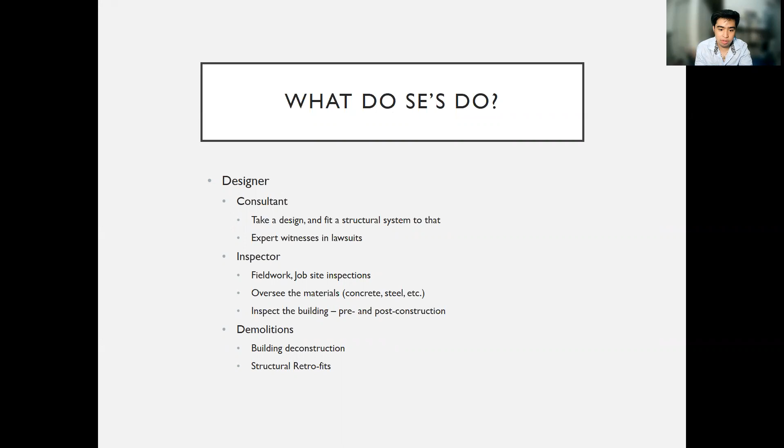Building deconstructions, structural retrofits. And the last one is what do they design?

What is a structure? A system designed to resist or support loading and dissipate energy. Building structures: houses, skyscrapers, anything designed for continuous human occupation. Non-building structures: bridges, tunnels, and dams.

So let us proceed to forces. Influence on an object that causes a change in a physical quantity. Considered vectors: magnitude and direction.

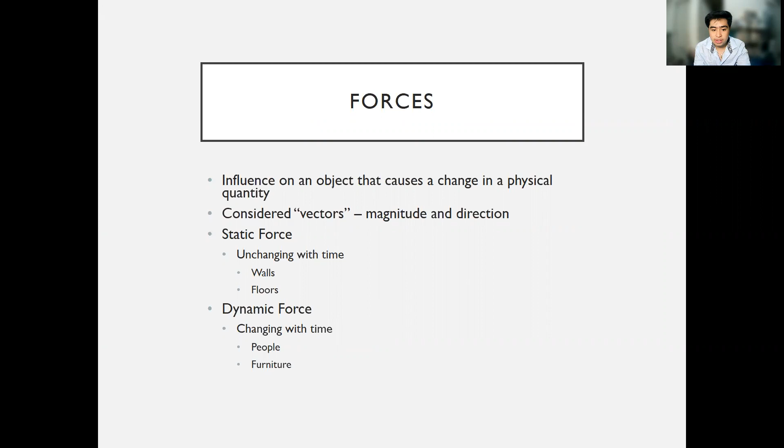Static force, unchanging with time: walls and floors. Dynamic force, changing with time: people, furniture.

So forces: axial forces, acting along one axis directly on a point or surface.

Momential force, acting along an axis at a certain distance from a point, causes a folding motion. M is equal to F times D, or force times distance.

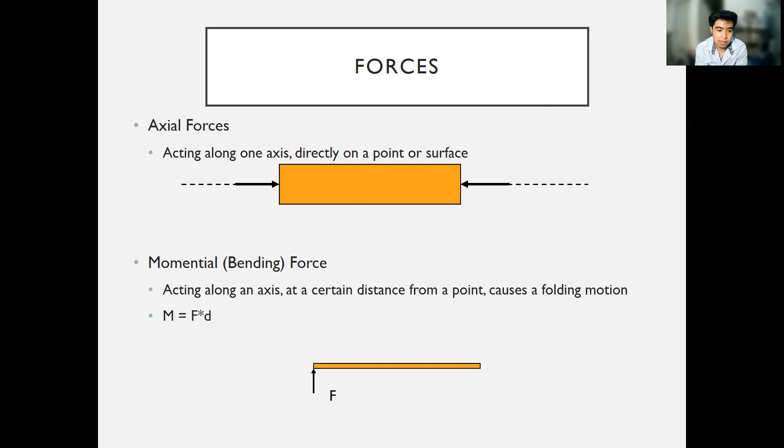Tensile force: pulling on an object, stretching it, showing necking when too much tensile force is applied. Compressive force: pushing on an object, collapsing it; concrete crushes when too much compressive force is applied.

Strain, a tensile-related property: deformation over length. Stress, a compression-related property: force over area. Compare using a stress-strain graph.

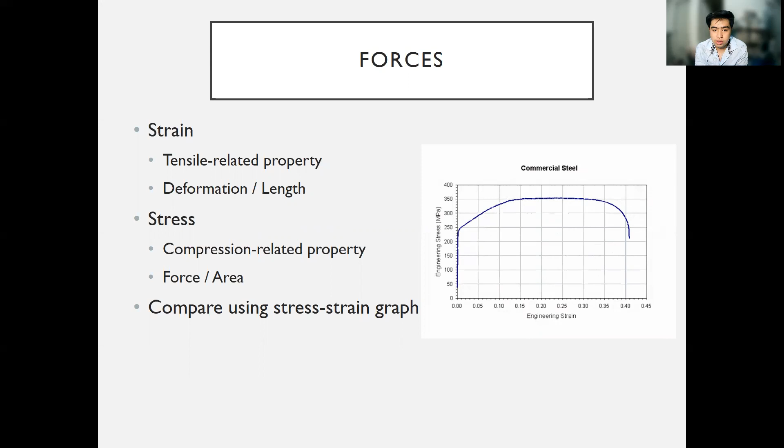What constitutes loading? Loading is a force being enacted on the structure. Many sources of load: gravity or weight, wind, snow, earthquake, and man-made.

Two types of structural loading: dead loads, static, ever present, example walls, floors, etc. Live loads, dynamic, changing.

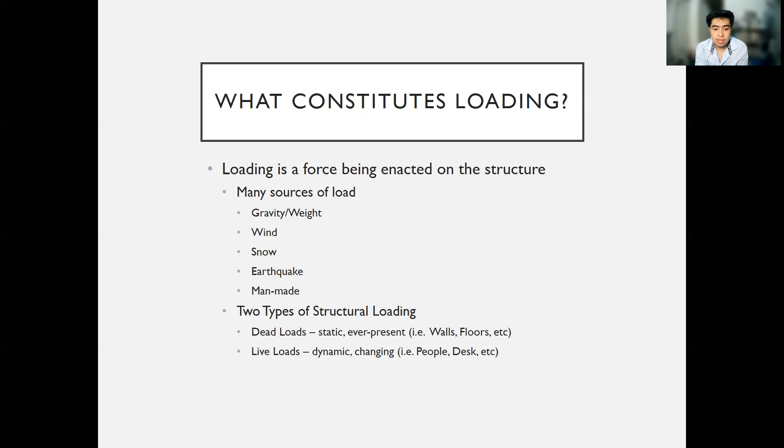What should we build our structures out of? Common structural materials: timber, masonry, concrete, steel, and composites.

Common material properties: strength, tensile or compressive, density, hardness, ductility or brittleness, elasticity, and toughness.

Strength: ability of a material to withstand loading. Tensile strength: ability of a material to withstand a pulling force. Steel is good at this, but concrete performs very poorly.

So let us watch a video.

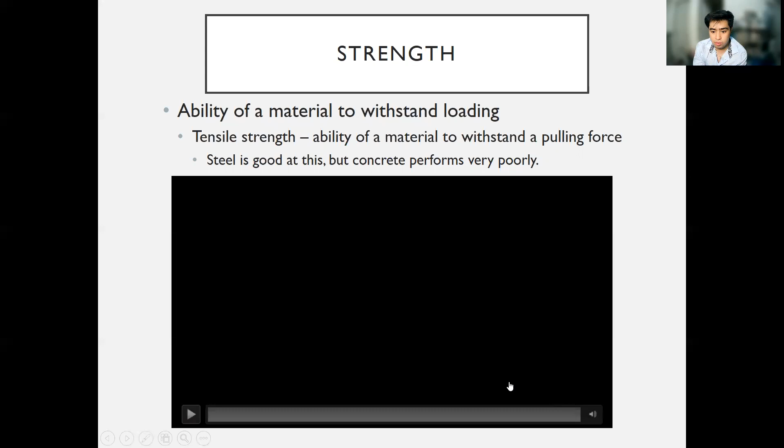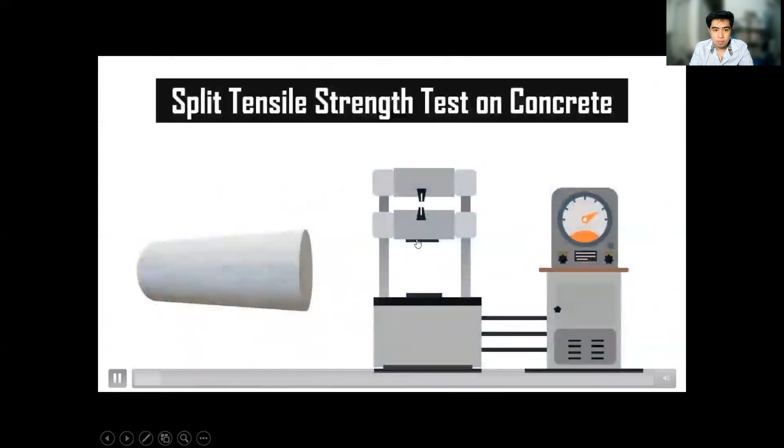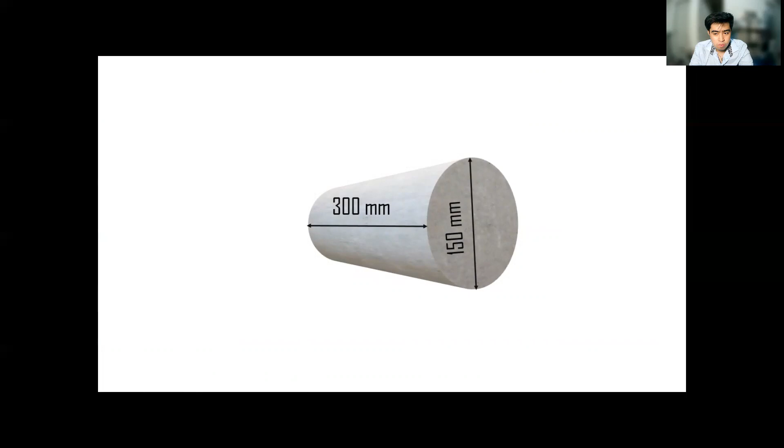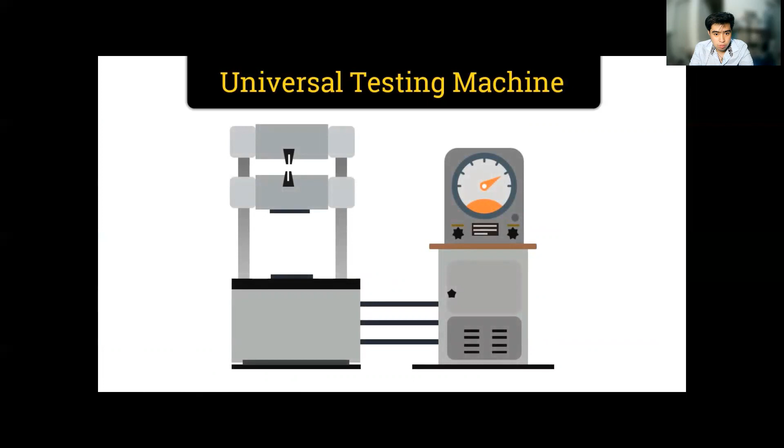Split tensile strength test on concrete. In the split tensile strength test, the tensile strength of concrete is obtained by applying a compressive force along the length of the concrete cylinder. The specimen used for this method is cylindrical in size, with dimensions of 150 mm in diameter and 300 mm in length. The instrument used for this method is the universal testing machine. The specimen is prepared in the standard manufacturing procedure and placed in the mold in layers, tamped using 25 blows for each layer.

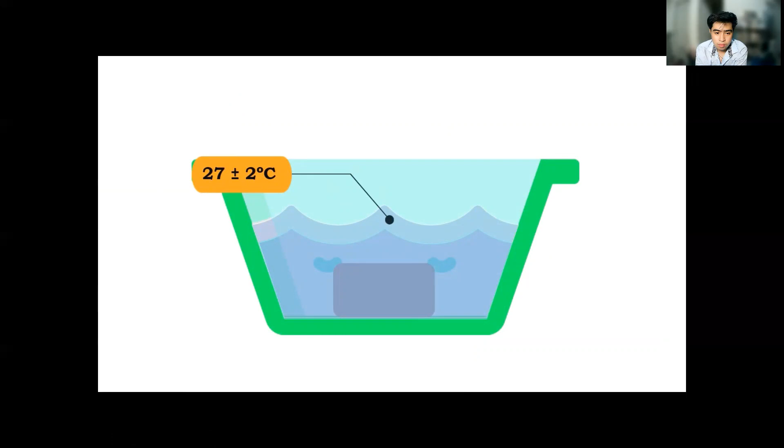After a day, the mold is removed and the specimen is placed in the curing tank at a temperature of 27 plus or minus 2 degrees Celsius. Depending upon the requirement, the test specimen is removed from the tank and dried at 7, 14, and 28 days for testing.

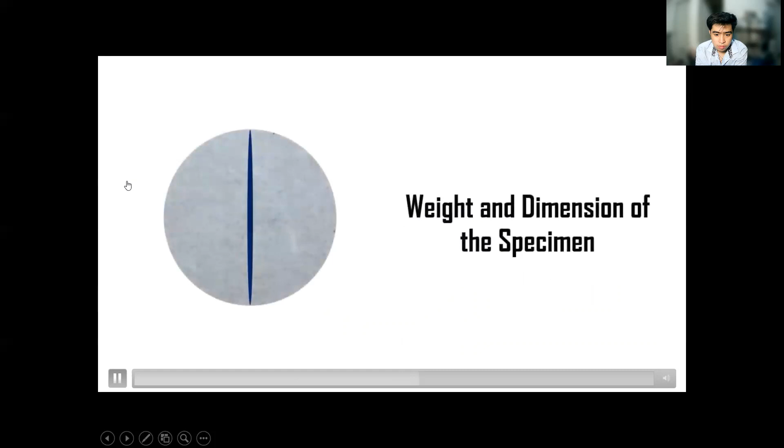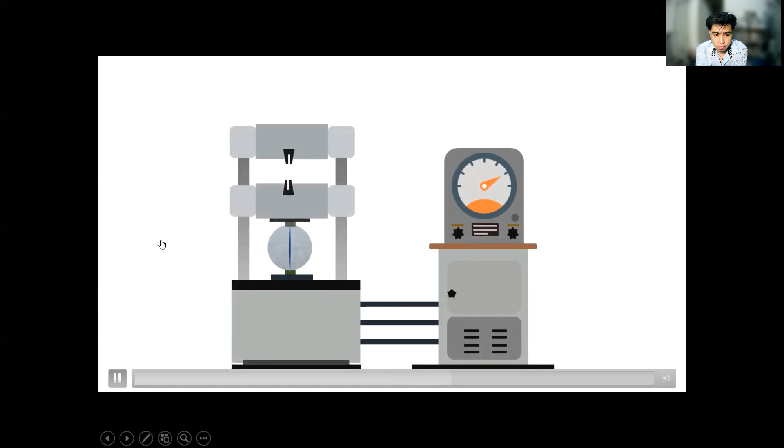Draw the line on the specimens as displayed on the screen. Then record the weight and dimension of the specimen. The specimen is placed longitudinally in the machine. A bearing strip made of plywood is placed on both sides of the specimen and aligned according to the marking. Sometimes supplement bars are placed on top of the plywood depending upon the diameter of the specimen.

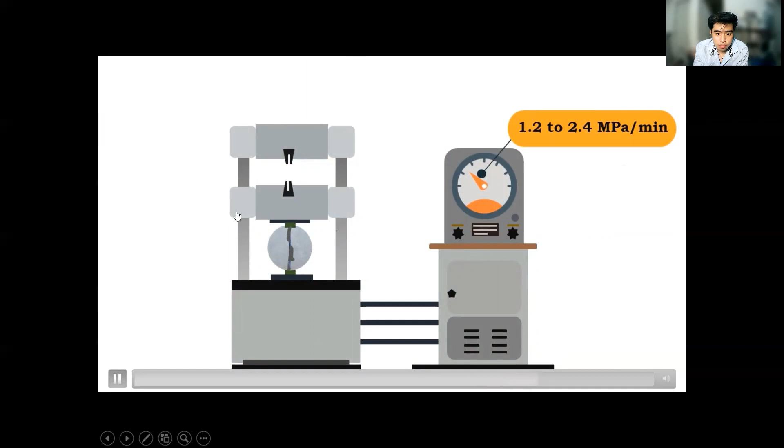Now apply the load continuously at a rate within the range of 1.2 to 2.4 MPa per minute. Finally, note down the load at which the cylinder fails by developing cracks. The resultant split tensile strength is calculated by the equation 2P divided by Pi into D into L, where P is equal to the load at which the specimen breaks.

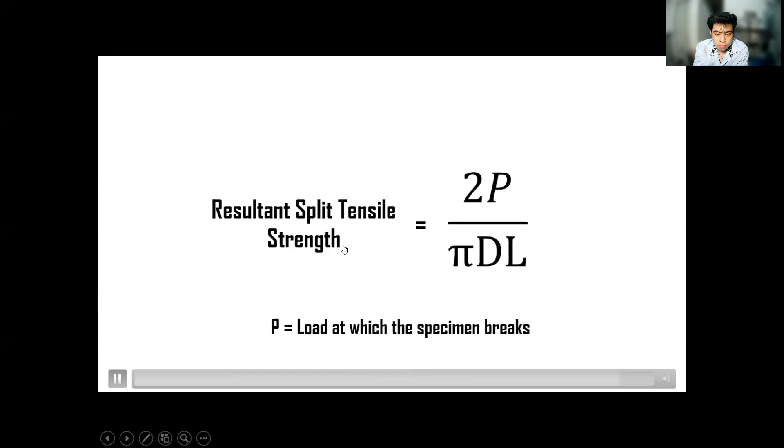So let us proceed to strength. Ability of a material to withstand loading.

Compressive strength is the ability of a material to withstand a pushing force. Wood, concrete, steel, and masonry perform well.

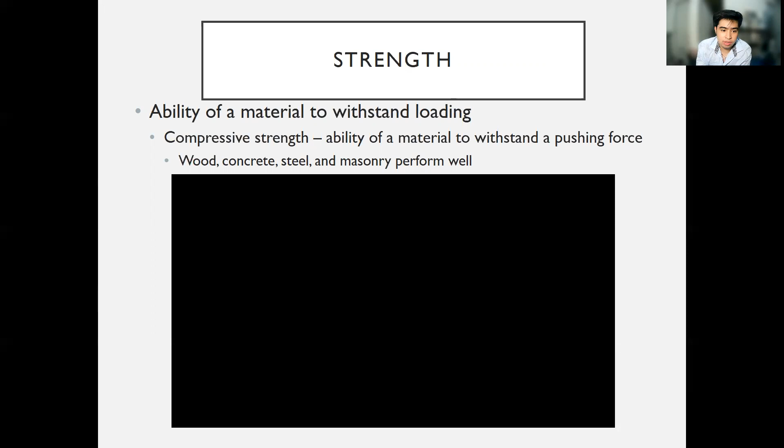So let us watch again a video.

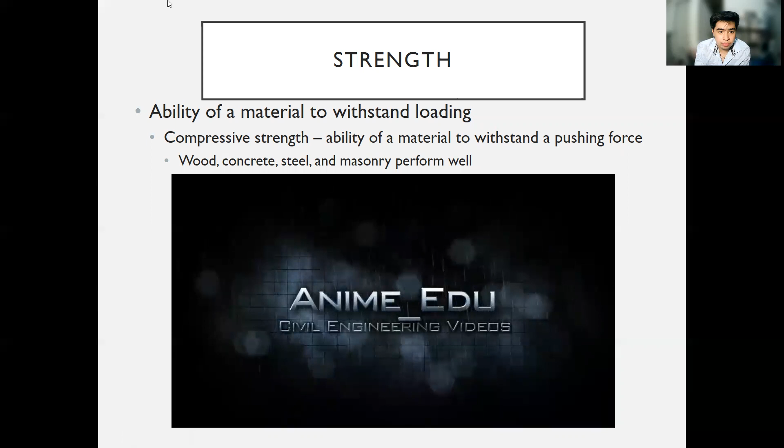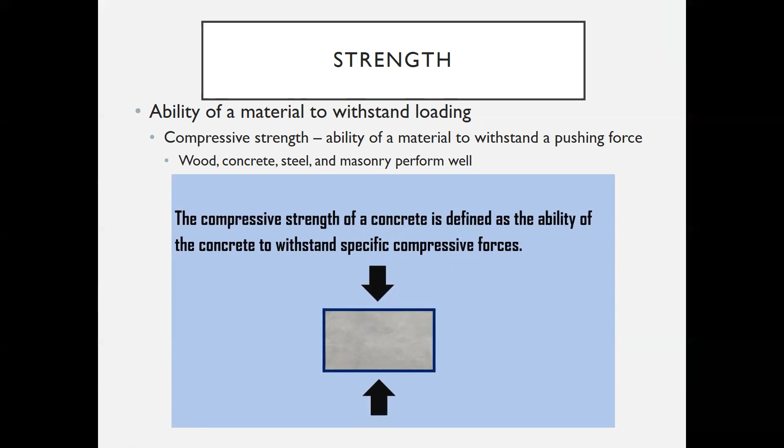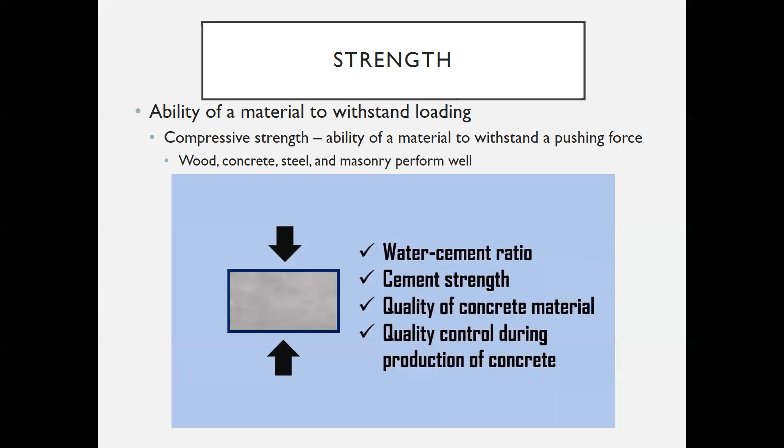Compressive strength test on concrete. The compressive strength of concrete is defined as the ability of the concrete to withstand specific compressive forces. Compressive strength of concrete depends on many factors such as water-cement ratio, cement strength, quality of concrete material, and quality control during production of concrete, etc. Generally, specimens shaped as cubes and cylinders are used for testing the compressive strength of concrete. The standard size of a cubical specimen is 150 mm by 150 mm by 150 mm,

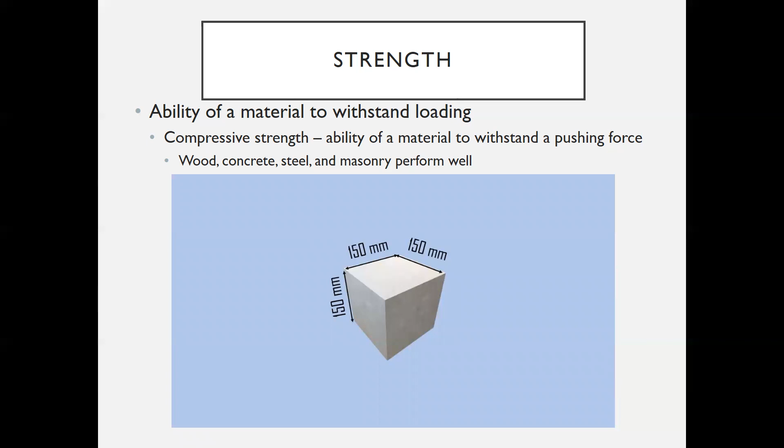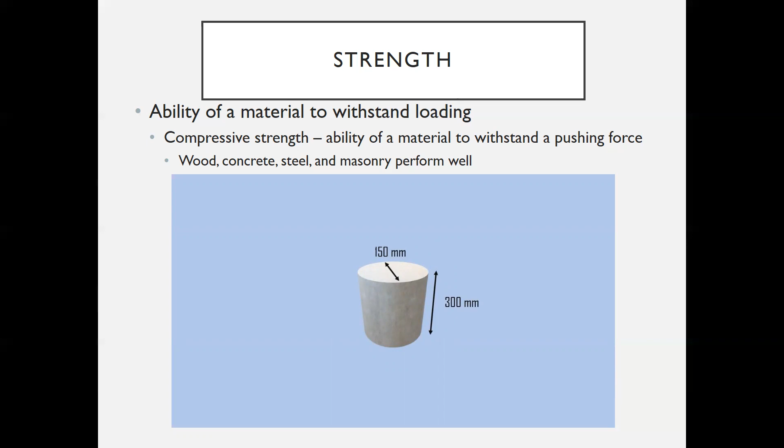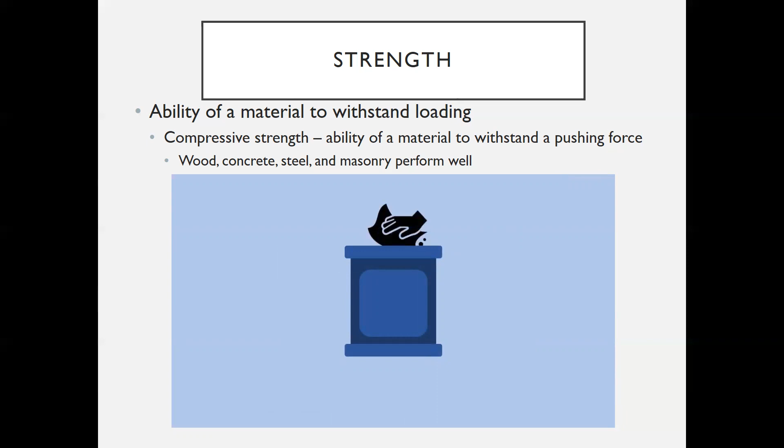while the cylindrical specimen is 150 mm in diameter and 300 mm in length. Generally, the fresh concrete is prepared according to the required grades and the respective mix proportion. Once the fresh concrete is prepared, the inner surface of the mold is greased to avoid sticking of concrete. The prepared fresh concrete is then filled into the mold in 3 layers. After filling each layer, tamping should be done 35 times for the cube and 25 times for the cylinder using a standard tamping rod. Once the mold is filled, level off the top surface with a trowel.

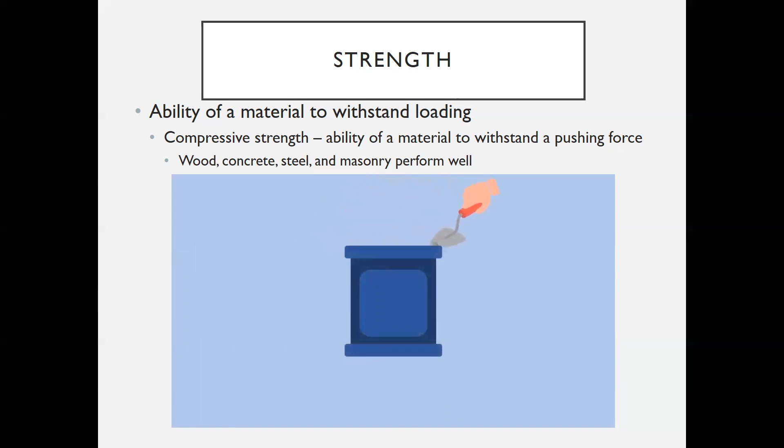After a day, the mold is removed and the specimens are placed into the curing tank at a standard temperature of 27 plus or minus 2 degrees Celsius.

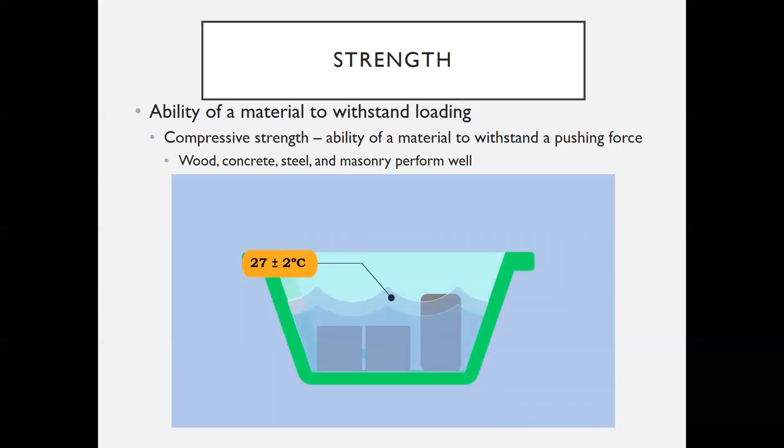After 7 days, the specimen is taken out of the curing tank and dried for a while. Then, the specimen is placed on the compression testing machine. The cube specimen is just placed on the bearing plate, while for cylindrical specimen, it is placed vertically. The instrument is adjusted such that the plate touches the top surface of the specimen.

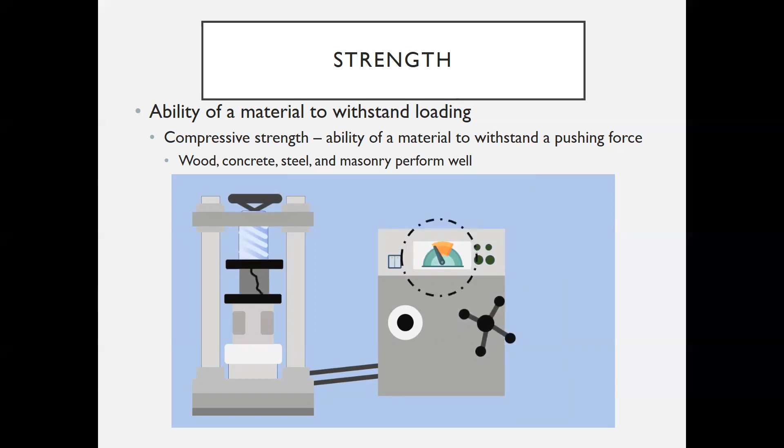The load is applied gradually over the specimen at the rate of 140 kg per centimeter square per minute. The load at which the specimen fails is noted. Thus, the characteristic compressive strength is calculated from the ratio of load and the area.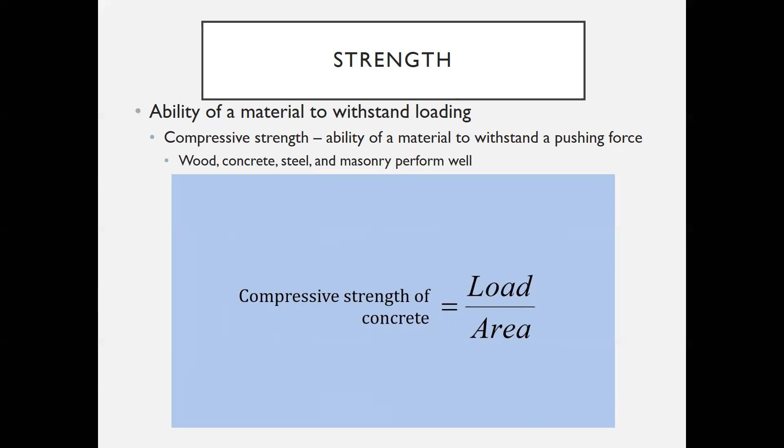The test is generally done with the help of 3 specimens and tested for 7 days, 14 days and 28 days.

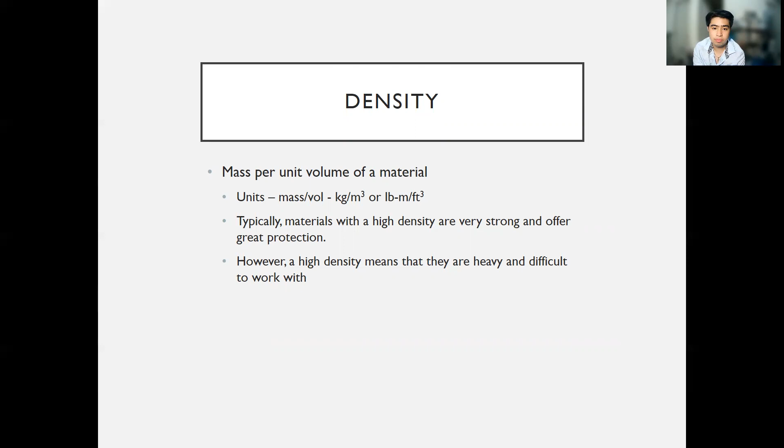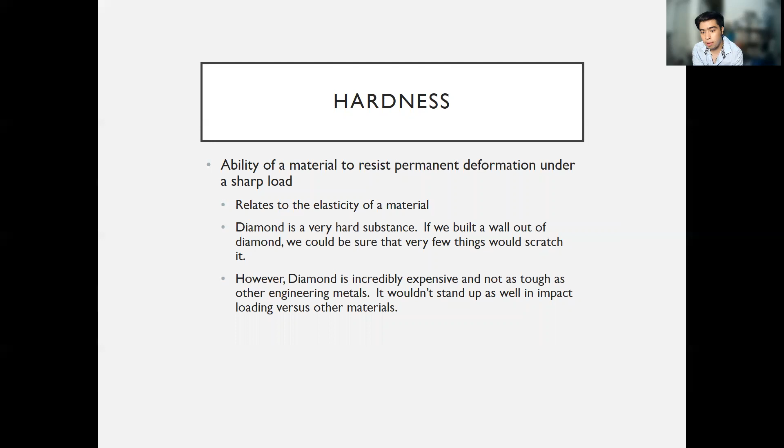Hardness is the ability of a material to resist permanent deformation under a sharp load, and relates to the elasticity of a material. Diamond is a very hard substance. If we built a wall out of diamond, we could be sure that very few things would scratch it. However, diamond is incredibly expensive and not as tough as other engineering metals. It wouldn't stand up as well in impact loading versus other materials.

Ductility and brittleness: the ability of a material to deform without fracture. We want materials with high ductility because they will indicate structural failure without a sudden collapse.

So let us watch a video. Let us watch a video. Wait.

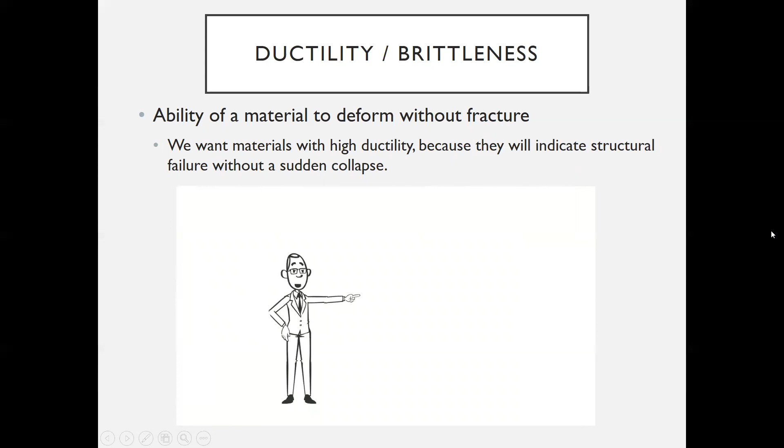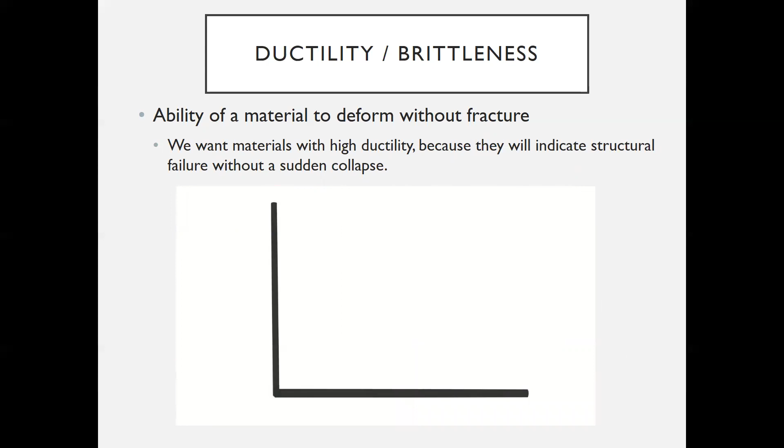Okay, welcome to Basic Sciences. Today's topic is brittle versus ductile materials, also known as ceramic versus metal. In a stress-strain graph, strain forms the x-axis and stress forms the y-axis. There is an elastic zone and a plastic zone.

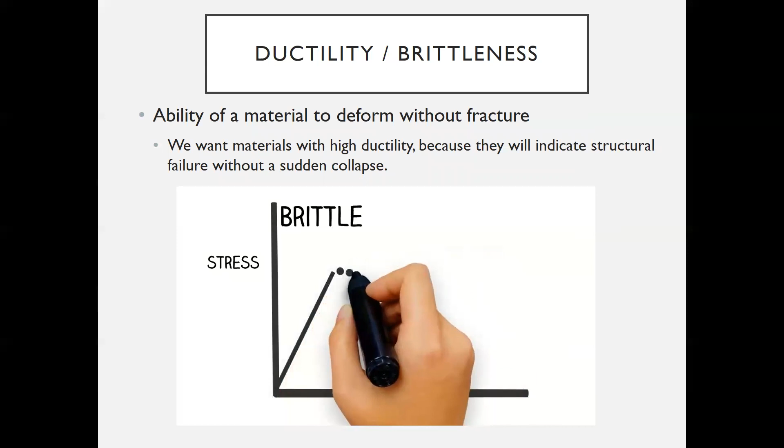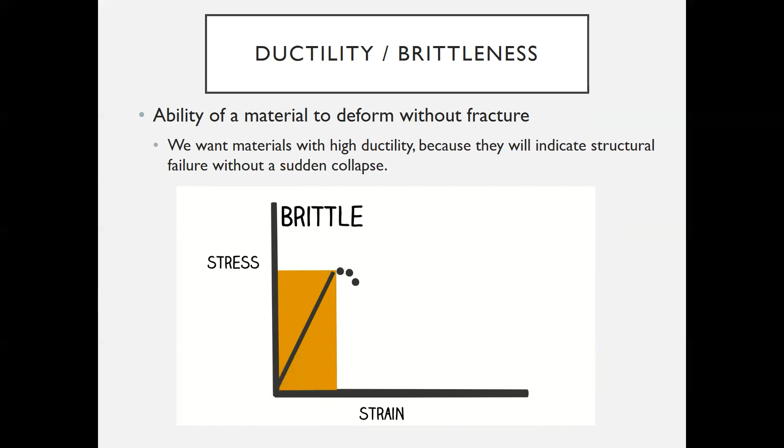Brittle is a material that exhibits a linear stress-strain relationship up until the point of failure. It undergoes elastic deformation only, and little to no plastic deformation. An example of a brittle material is ceramic. This elastic zone is longer in brittle materials relative to the short plastic region before breakage.

A material is ductile when it undergoes a large amount of plastic deformation before failure. Ceramic is brittle and metal is ductile.

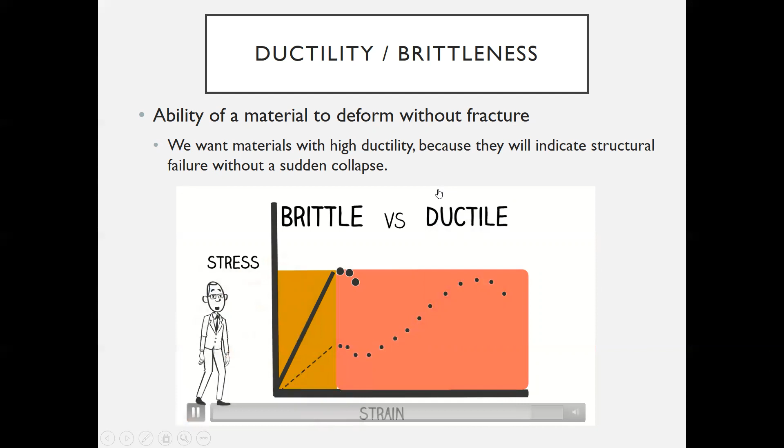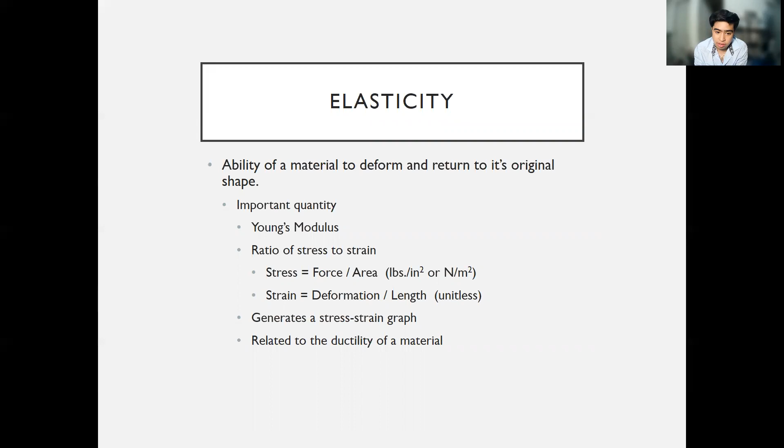Next is elasticity: the ability of a material to deform and return to its original shape. An important quantity is Young's modulus, the ratio of stress to strain. Stress is equal to force over area. Strain is equal to deformation over length. This generates a stress-strain graph related to the ductility of a material.

Next is toughness: the ability of a material to resist fracture when stressed. It is the amount of energy absorbed per unit volume. The units are joules over meters cube, or pound-force over feet cube. It is the area under the stress-strain curve, evaluated from 0 to the desired strain.

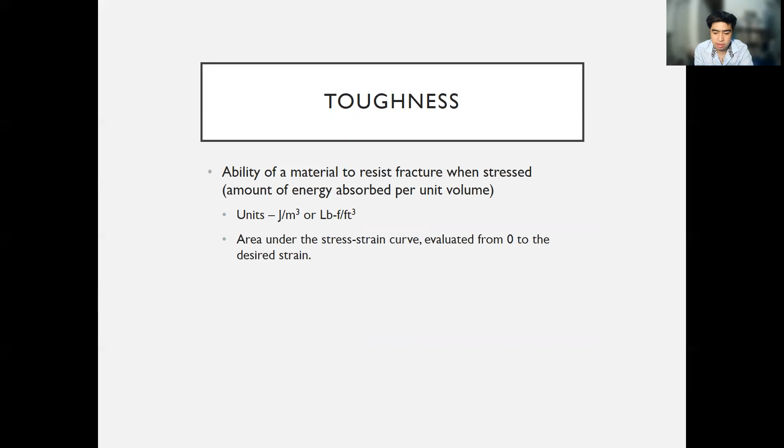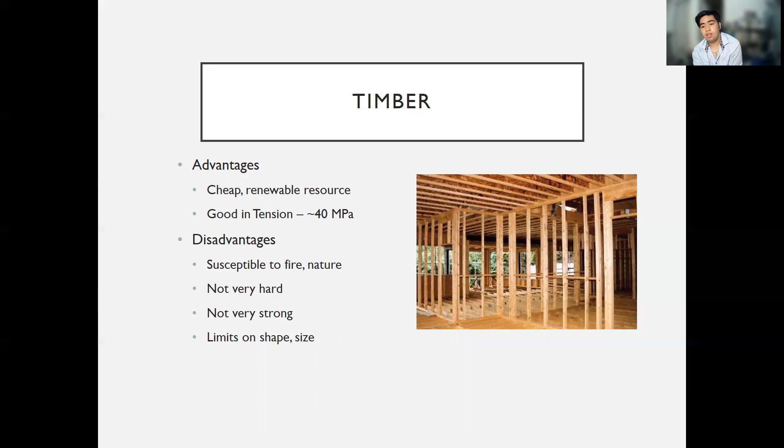So we know what properties are important in structural materials. How do the common materials stack up against each other? Timber: advantages are that it is a cheap renewable resource with good tension, 40 MPa. Disadvantages are it's susceptible to fire and nature, not very hard, not very strong, and has limits on shape and size.

Masonry: concrete blocks, clay bricks. Advantages of masonry are large compressive strength, cheap, and good thermal properties that hold heat well. Disadvantages are that it's not a cohesive material; the strength could depend on the mortar and other factors. It has poor tensile strength unless reinforced, is a heavy material requiring skilled laborers, has height restrictions, and is susceptible to the weather.

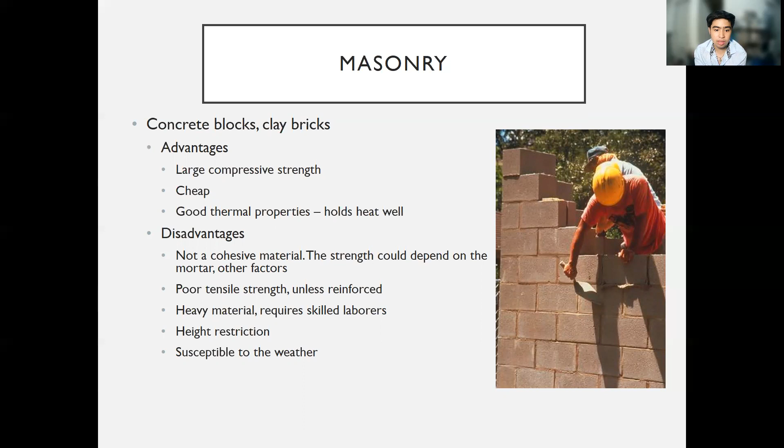Let us now proceed to concrete: a combination of water, cement, small aggregate, and large aggregate. These are the advantages of concrete: very versatile, can be modified with admixtures for different effects, high compressive strength of 4 to 7 KSI, fire resistant, and many diverse sizes and shapes.

Formwork. These are the disadvantages of concrete: long curing time, low tension strength of 0.4 KSI, fails in shear unless reinforced, and is a fairly heavy material to work with.

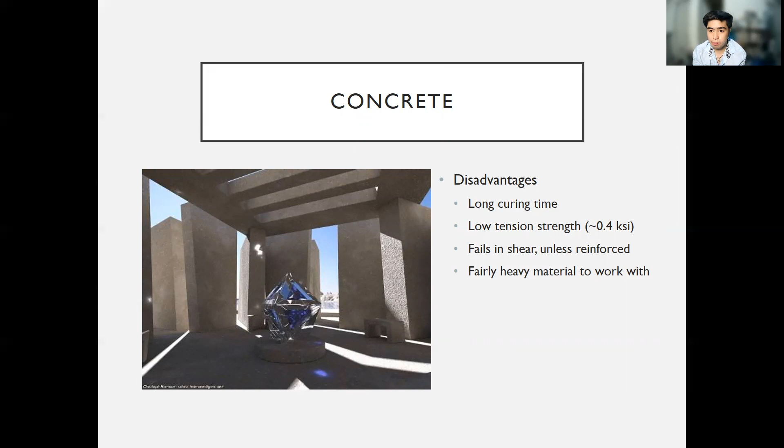Let us now proceed to steel. These are the advantages of steel: high tensile and compressive strength, A36 steel at 60 KSI, many varieties depending on your need such as carbon steel, stainless steel, and galvanized steel. It is an elastic material, a ductile material, and comes in many shapes and sizes.

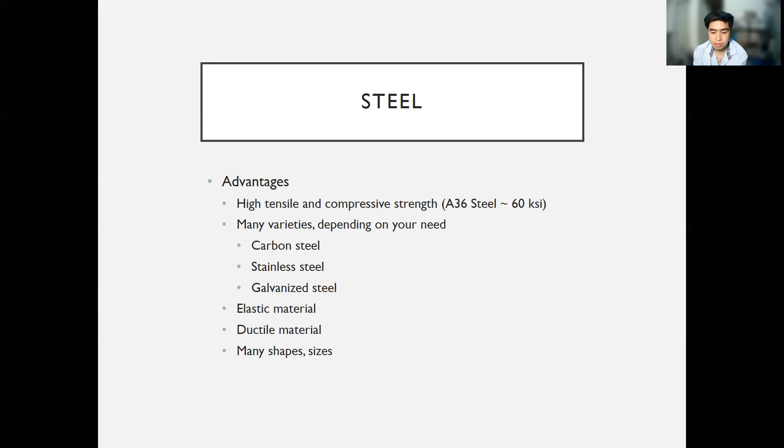Disadvantages: expensive, limited quantities or competition, susceptible to fire, rust, and impurities.

Reinforced concrete is concrete with steel reinforcement, where concrete handles compression and steel takes tension. It can handle nearly 4 times the loading that concrete alone can handle.

It is a more expensive material. So let us watch again another video.

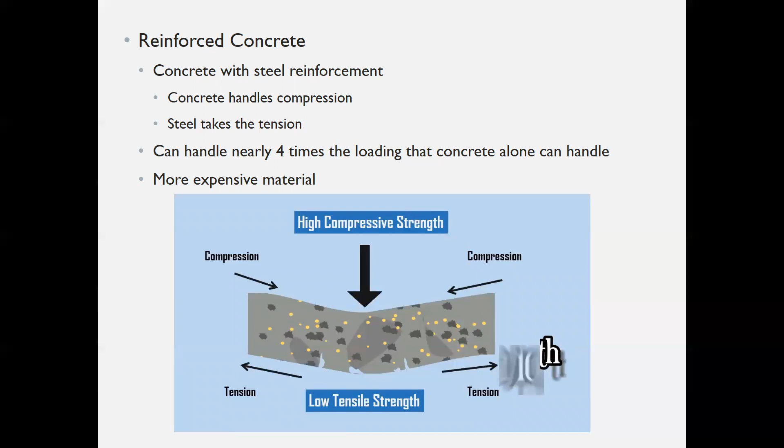Reinforced cement concrete: the hardened concrete is generally high in compressive strength, but its tensile strength is very low, approximately 1/10 of its compressive strength. We can say concrete is strong in compression and weak in tension.

To strengthen the concrete section in tension, reinforcement steel is embedded into the concrete. This composite section is called reinforced cement concrete.

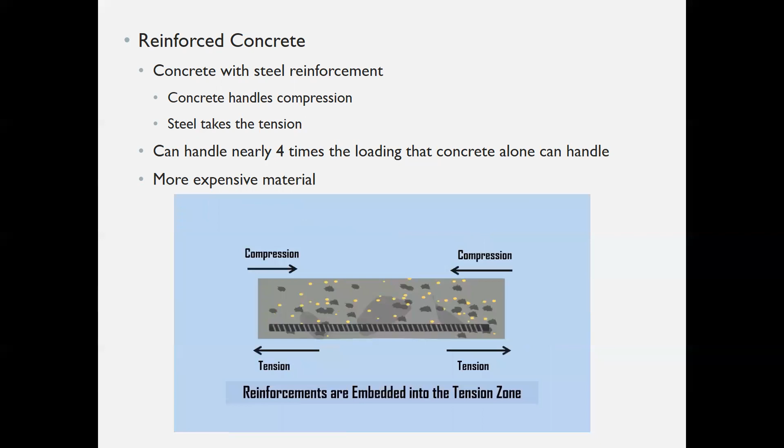The reinforcing steel also imparts ductility to the concrete, which is primarily brittle. The reinforcements are embedded into the tension zone of the section to counteract the tension force acting in the section.

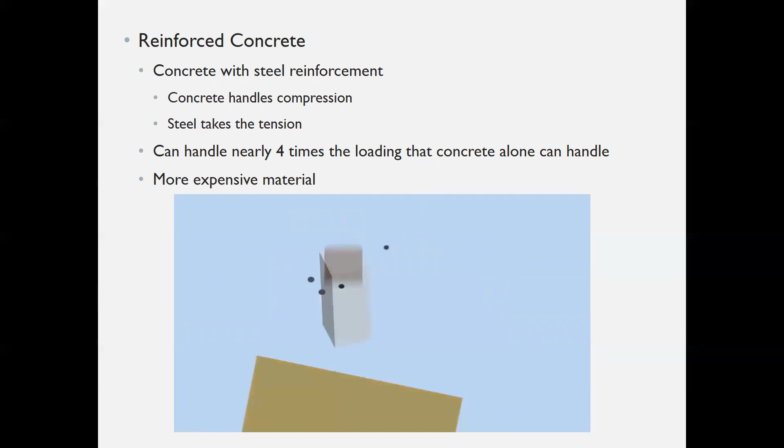Most of the modern-day buildings are constructed using this type of concrete. In case of compression members, reinforcing steel also acts as a supplement in bearing compressive forces.

In recent times, polymers are also widely used for making reinforced concrete. We have already made a video on this, link available in the description.

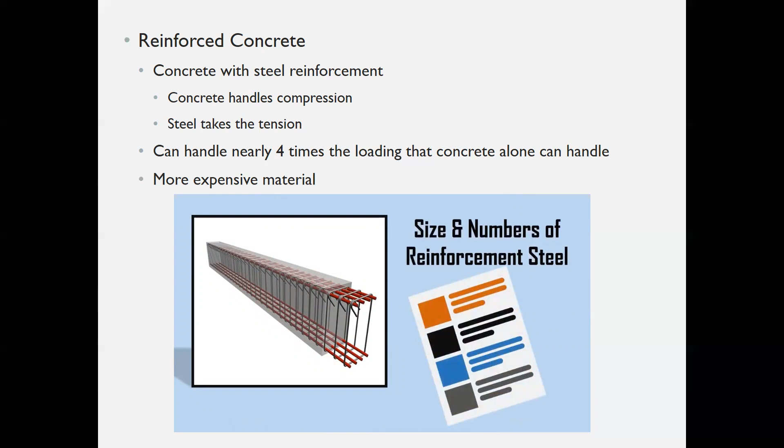The usage of reinforcement, such as size and number of reinforcement steel, should be designed based on various factors and should also be confined to a specific code of practice. Improper size and number of reinforcements may result in failure of the structures.

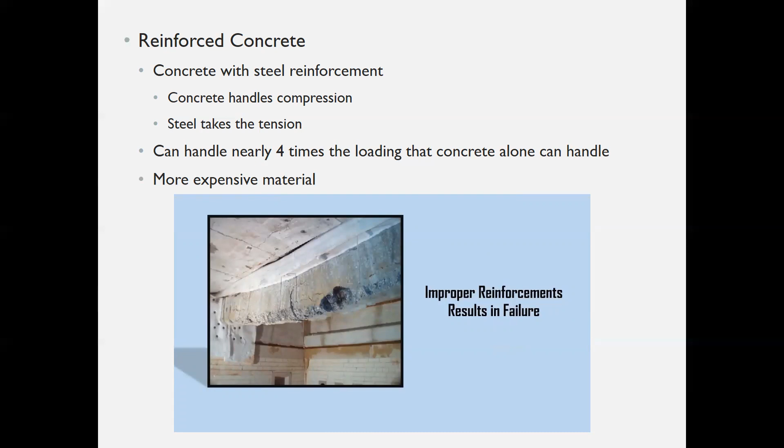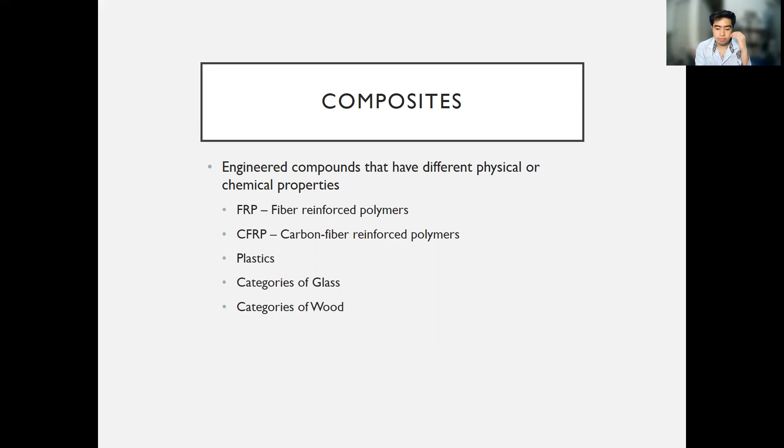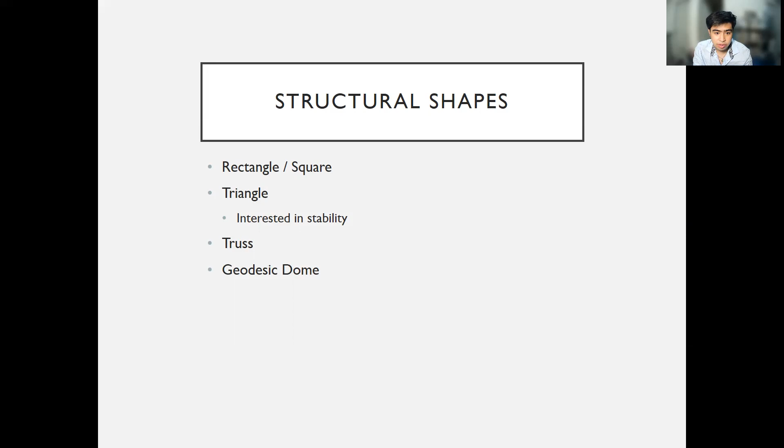Shape stability exercise. Must be split into teams of 5. Build a triangle and square. See which shape is the most stable. Can the unstable shapes be made stable? How?

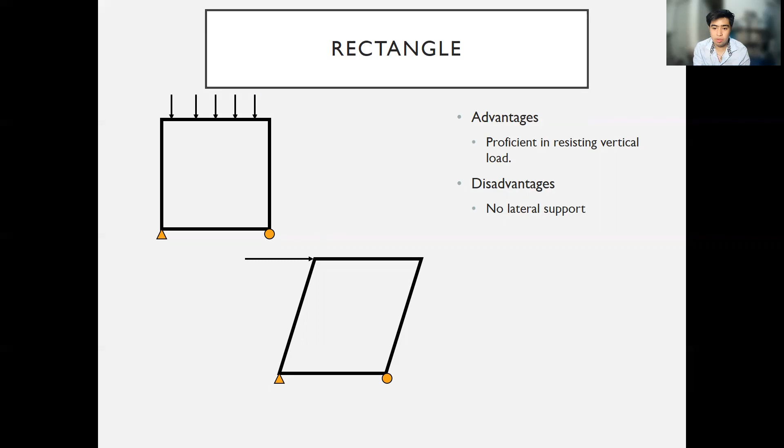Rectangle. Advantages: proficient in resisting vertical load. Disadvantages: no lateral support.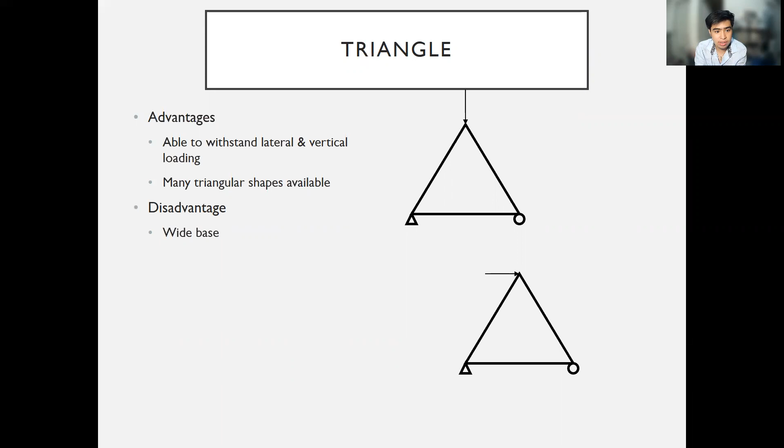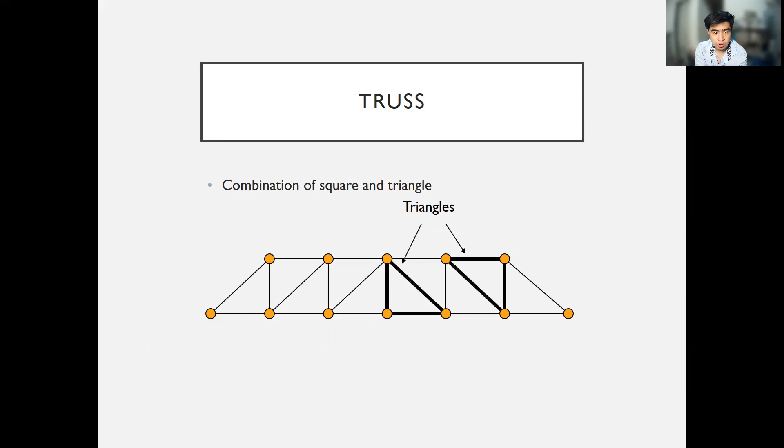Truss. Combination of square and triangle. These are the sample pictures. Provides both vertical and lateral support.

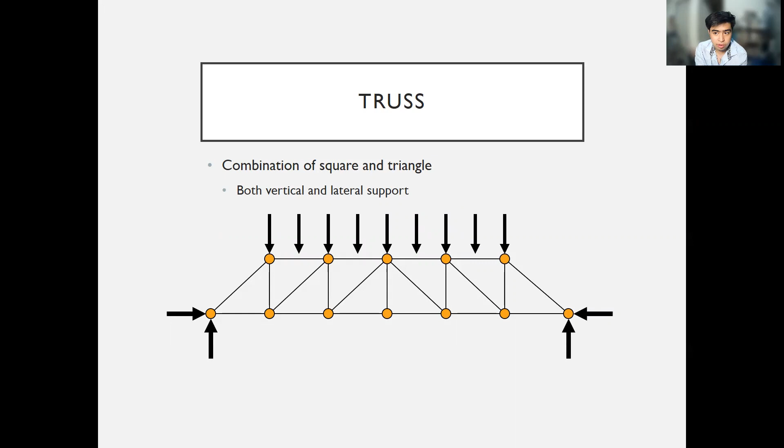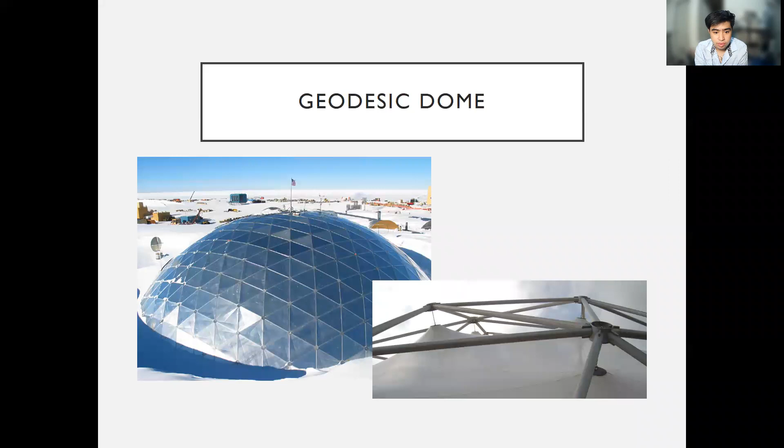Geodesic dome. The advantages of the dome: very strong shape, gets stronger as the dome size increases, perfect load distribution, no need for structural supports, and great aerodynamic performance.

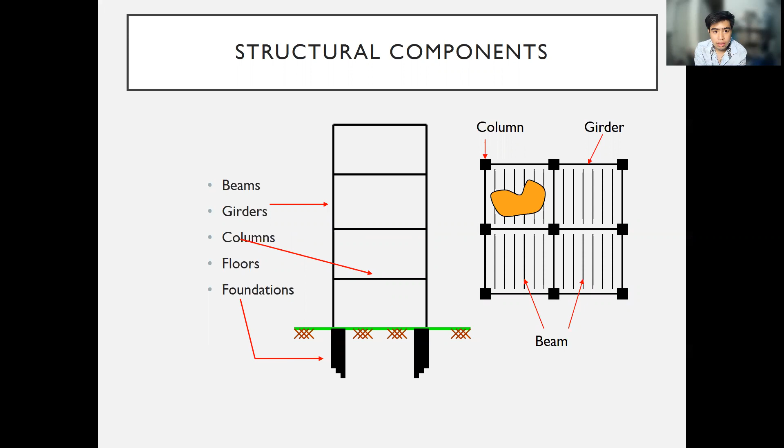Beams, girders, and load path: floor, beams, girders, columns, foundation, and soil bedrock.

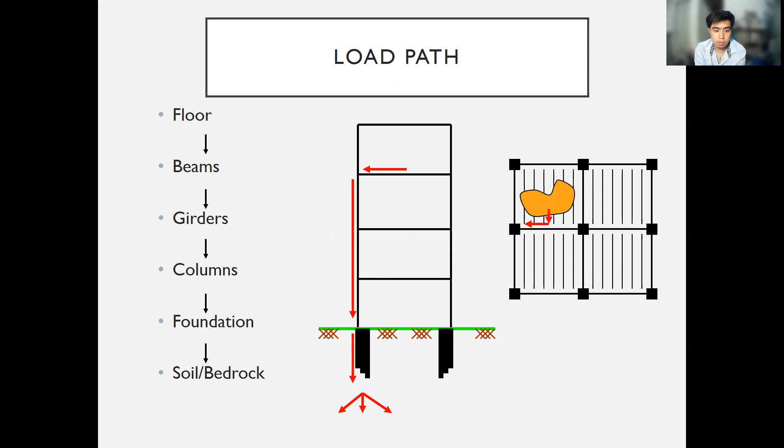So let us now proceed to foundations. They support the building and are typically attached to columns. Types include shallow: spread footing, which is a concrete strip or pad below the frost line, and slab on grade, a concrete pad on the surface. Deep foundations include drilled shafts and piles.

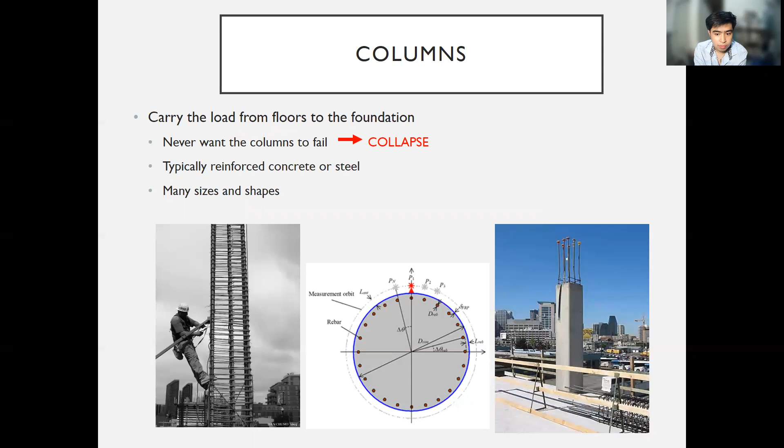Girders attach column to column. They take the load from the beams and transfer it to the columns, generally shaped as an I-beam.

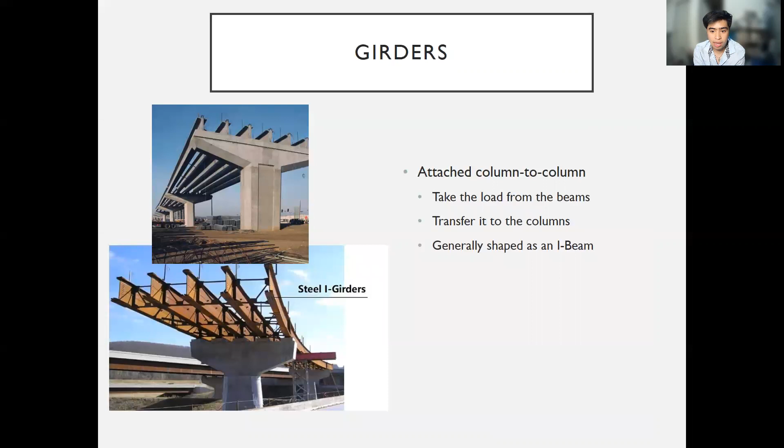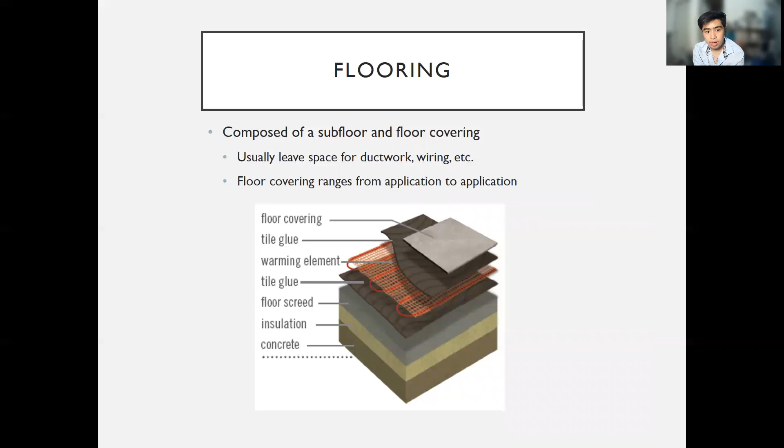Flooring is composed of a subfloor and floor covering. It usually leaves space for ductwork, wiring, etc. And floor covering ranges from application to application. So these are the sample videos.

Have you ever stopped to wonder at the huge variety of buildings and structures we see all around us? Why do we just assume that houses will stay up and bridges won't fall down?

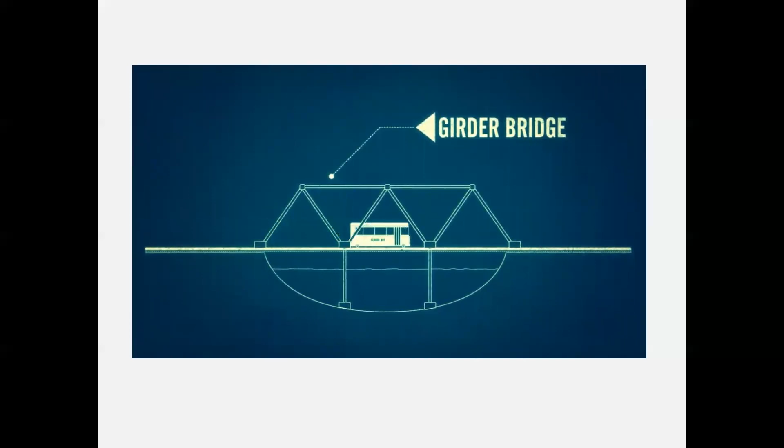The answer can be found in the work of the structural engineer. As highly trained professionals, they work with architects and surveyors to ensure that whatever they are building can sustain the loads and stresses it will have to bear. As well as improving the places where we live, they are the guardians of safe construction too. The challenges they face are diverse and require both creativity and problem-solving skills. That's why structural engineers are both designers and problem solvers.

There are specialists who account for extreme conditions such as heavy snow or coastal storms. There are seismic structural engineers who meet the challenges of construction within earthquake zones. There are those who focus on disaster relief, helping to rebuild shattered communities and restore normal life. There are engineers who specialize in renovating old buildings for continued use, whilst preserving heritage and meeting modern standards. And then there are forensic experts who investigate the reasons why some structures fail.

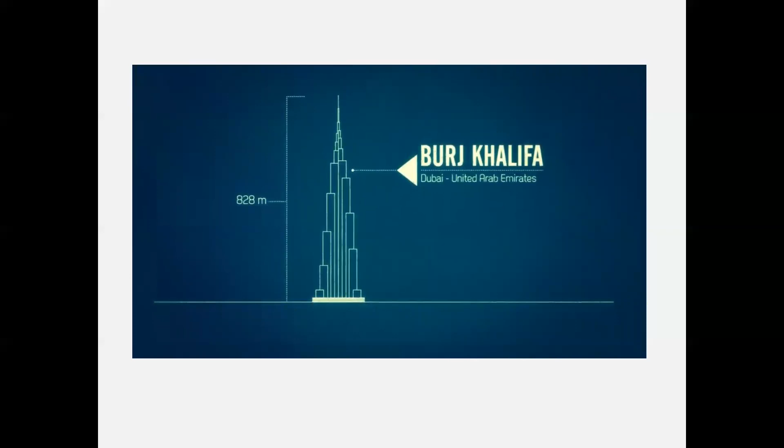Today, structural engineers must also face the issues of climate change, which will make structures need to endure more challenging environments over time. Sustainability is an increasingly important goal. New regulations require materials and construction techniques to create green buildings that are still strong and secure. Structural engineers are responsible for some of the most innovative concepts, projects, and designs. They are developing new technologies and techniques to create extraordinary structures that are quite literally changing the world.

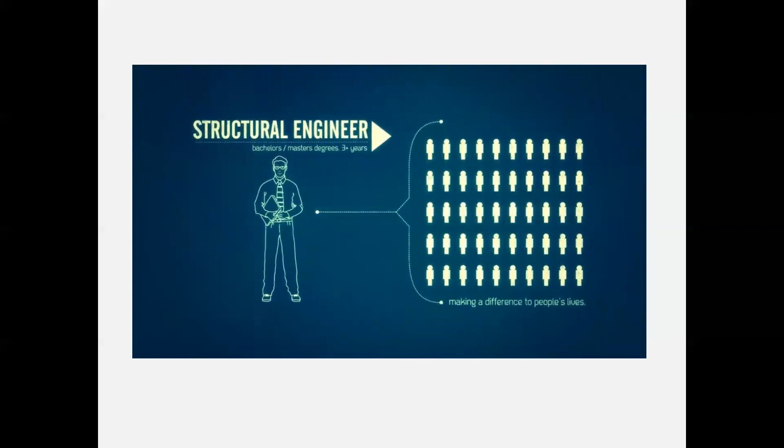But the work of the structural engineer isn't just focused on groundbreaking schemes. They are also making a difference to people's lives. Buying or improving your home can be a major expense, but you could save money by consulting a qualified engineer. They identify problems early on, provide cost-effective solutions, and ensure that all regulations are properly met. They can also check that a property is structurally safe and secure, with no nasty surprises to come later on.

With 27,000 members in over 100 countries, the Institution of Structural Engineers upholds and supports the highest standards of the profession as a whole. Our members have to pass some of the most stringent exams that exist. The institution's post-nominal qualifications are an internationally recognized guarantee of professional excellence and expertise. Our annual ceremony, the Structural Awards, recognizes best practice and excellence from all over the world. Our members have proved their abilities and earned their clients' trust. You can rest assured that the right professional people are working for you.

So the next time you are up on the 50th floor, crossing a bridge, or simply strolling through town, stop and reflect on just how much we owe to the talents and skills of the structural engineer.